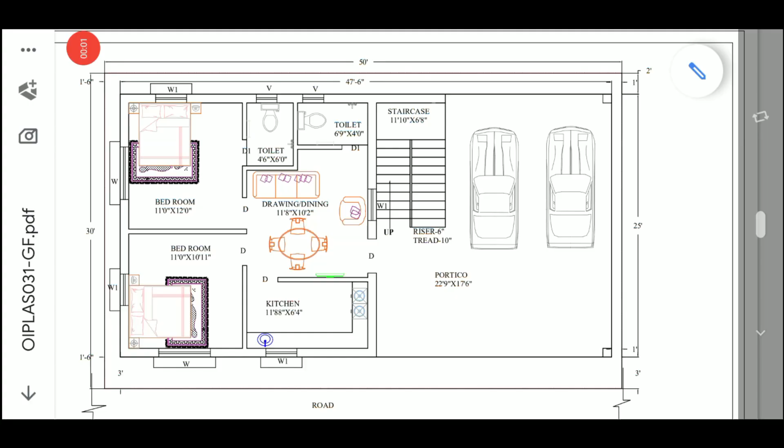Hey guys, this is Mainak from Civil Center, and today I'm back with another plan in a plot area of 1500 square feet. The building is east facing, having two floors or stories, that is a G+1 building.

Now let us quickly look at the dimensions of the plot. As you can see, the dimensions of the plot are 50 feet into 30 feet. The dimensions of the built up area of the ground floor are 47 feet 6 inches into 25 feet.

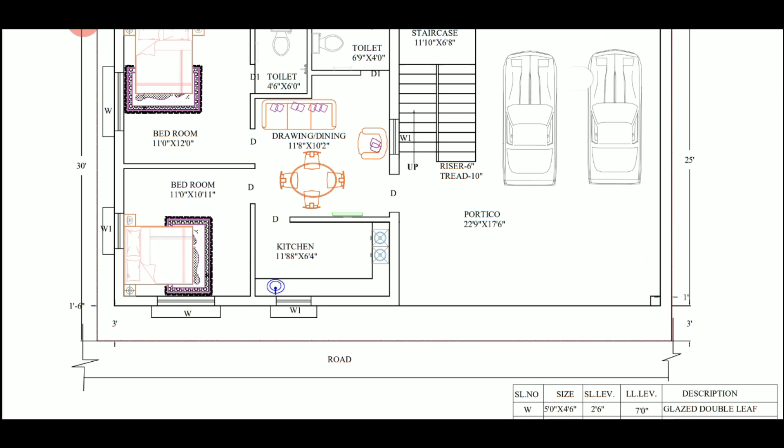Setbacks are the distance between the boundary or corner of the plot and the portion where construction has been done. The setback on the rear side is 2 feet, and on the front side we have provided a setback of 3 feet. On the left side we have given a setback of 1 feet 6 inches, and on the right side a setback of 1 feet. These are the distances left from the boundary of the plot.

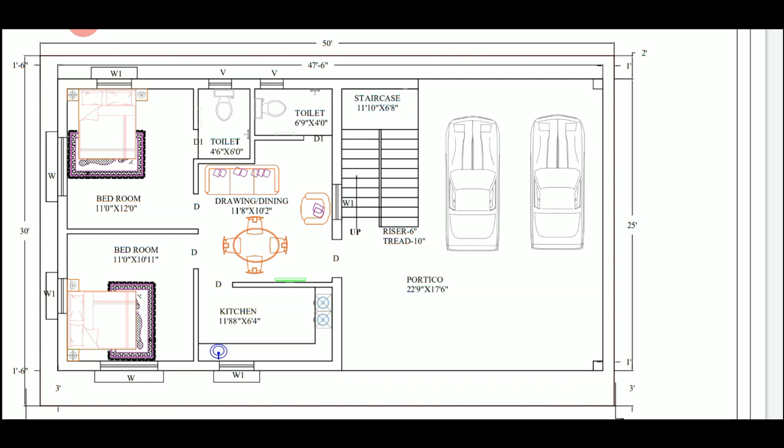Now let us discuss the components of this ground floor building. In the ground floor we have provided a portico, two bedrooms, one attached toilet, one common toilet, a drawing cum dining area, and one kitchen. Now let us start with a detailed description.

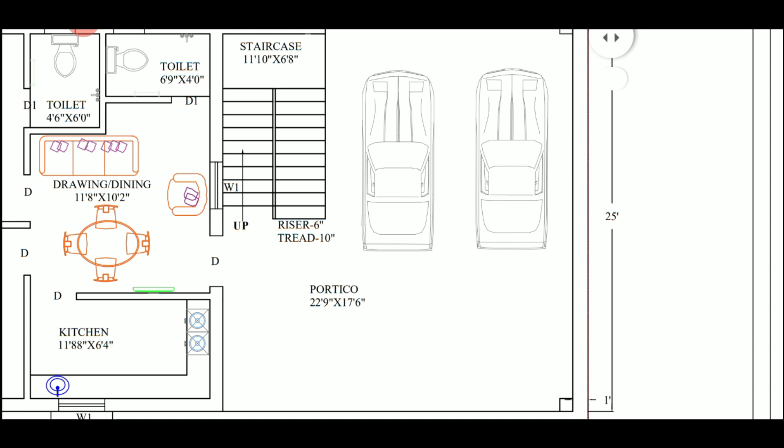The portico size is 22 feet 9 inches into 17 feet 6 inches. This space is sufficient for parking 2 four-wheelers and a minimum of 6 two-wheelers. This has been done because in this building we will have 3 units. In the ground floor we have 1 unit, and in the first floor we have 2 units, meaning 3 families can reside in this building. The parking space has been given accordingly.

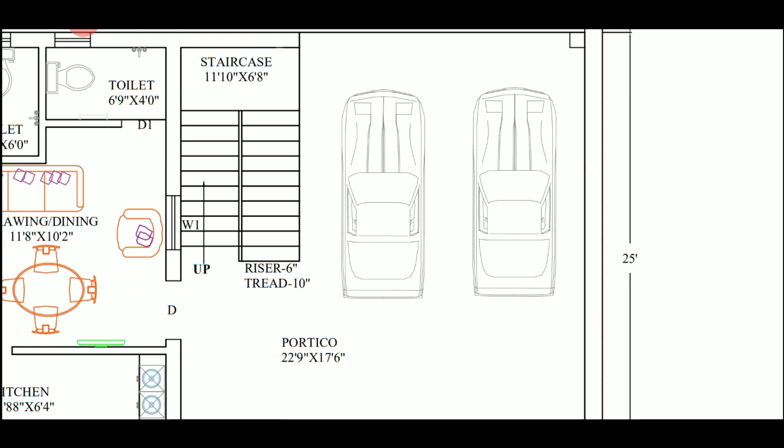The staircase has been given in such a way that all 3 units can use it independently. It is a dog leg staircase having a riser of 6 inches and tread of 10 inches, which is the standard dimension for a residential building.

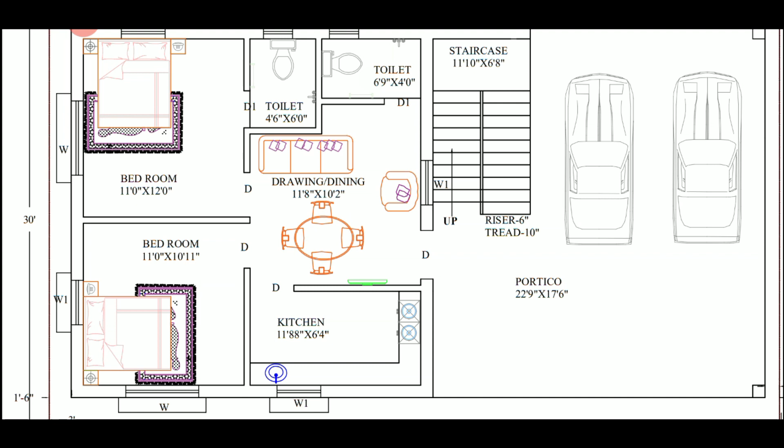Moving forward, in the first unit of the ground floor, the entrance leads to the drawing cum dining area. The dining area is adjacent to the kitchen because both have similar utility. The size of the kitchen is 11 feet 8 inches into 6 feet 4 inches. This is the drawing area where guests as well as residents of the house can come and sit.

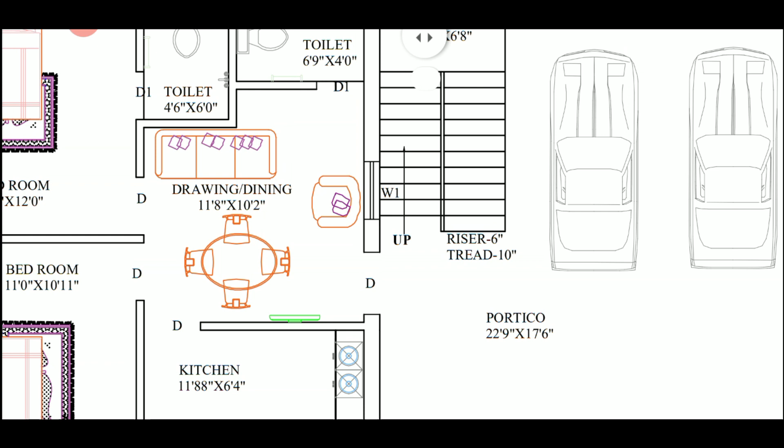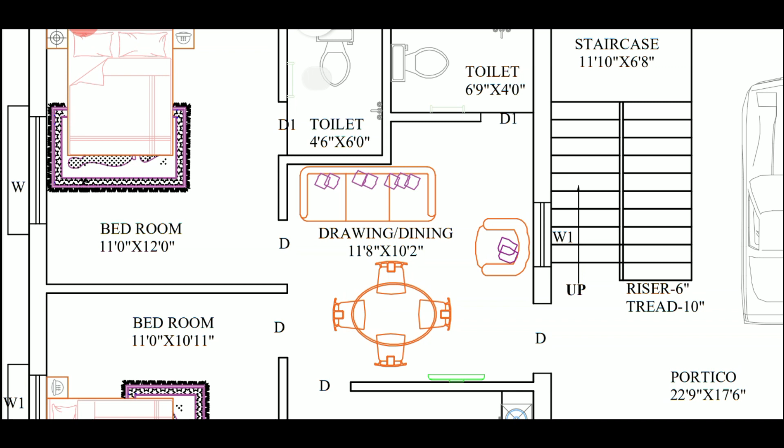There is a common toilet here having a size of 6 feet 9 inches into 4 feet. There are 2 bedrooms which are quite decent in size. The first bedroom is 11 feet into 10 feet 11 inches, and the second bedroom, which has an attached toilet, is 11 feet into 12 feet. The size of the attached toilet is 4 feet 6 inches into 6 feet. These were the dimensions of the elements in the ground floor.

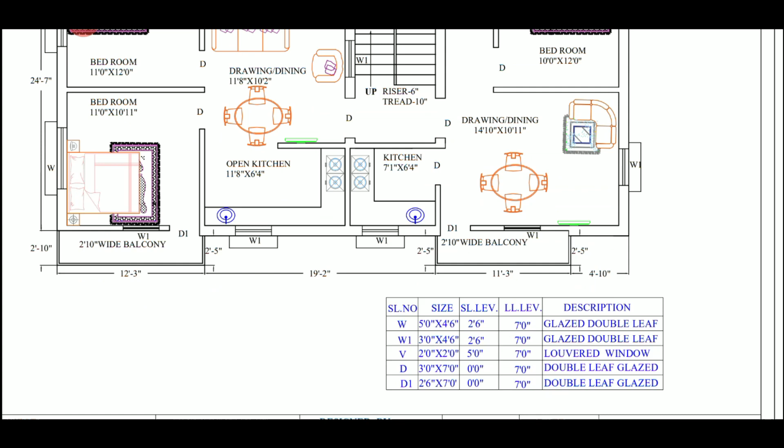Now let us quickly go through our first floor plan. The built up area of the first floor is 1244.32 square feet compared to 1187 square feet of the ground floor. This is due to the balconies we have provided in the rooms. In the first floor we have 2 separate units: one is the 1BHK portion, that is 1 bedroom, 1 kitchen and 1 dining, and the other is a 2BHK portion.

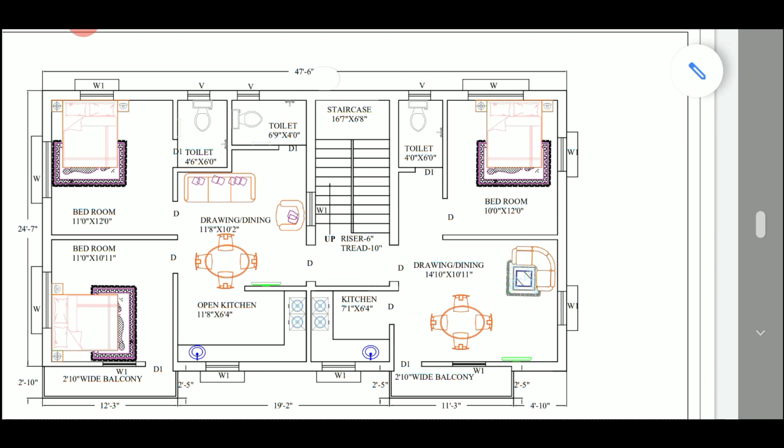So now let us first describe this portion. Here we have one bedroom of size 10 feet into 12 feet. So this is the size of the bedroom.

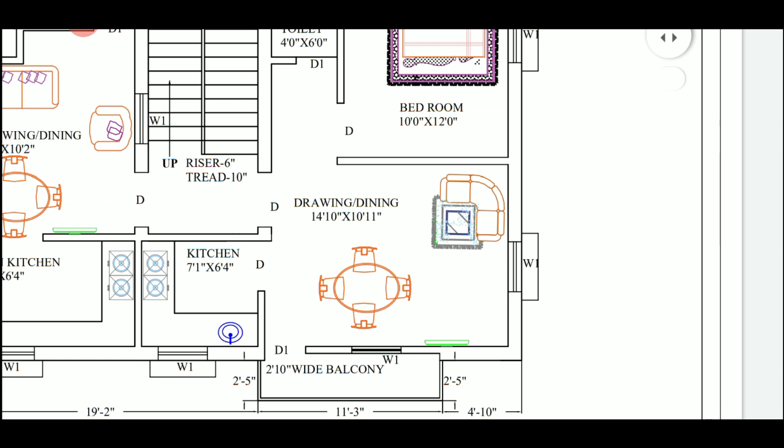We have one common toilet of 4 feet into 6 feet, and then again we have a kitchen here of 7 feet into 6 feet 4 inches, and one drawing cum dining area which is quite decent in its size, 14 feet 10 inches into 10 feet 11 inches.

Now as you can see here, we have given a balcony of 2 feet 10 inches wide. So 2 feet 10 inches is the width of the balcony, so it will give some proper aeration and sunlight to this first floor plan.

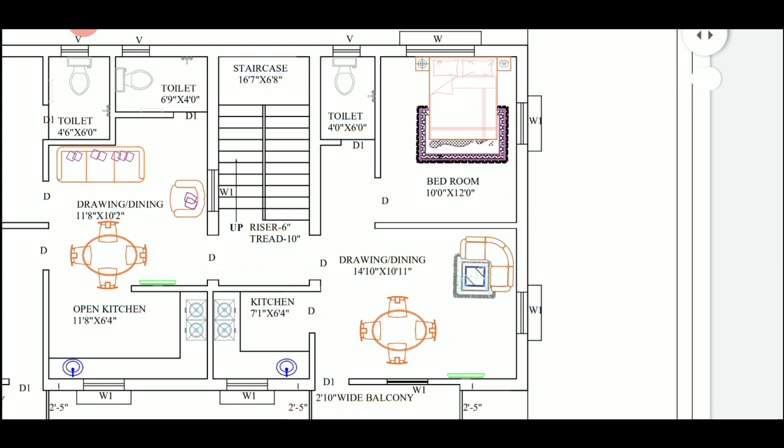Now this unit is suitable for a small family or bachelor, which can also be given for rent. Now let us move to the other unit.

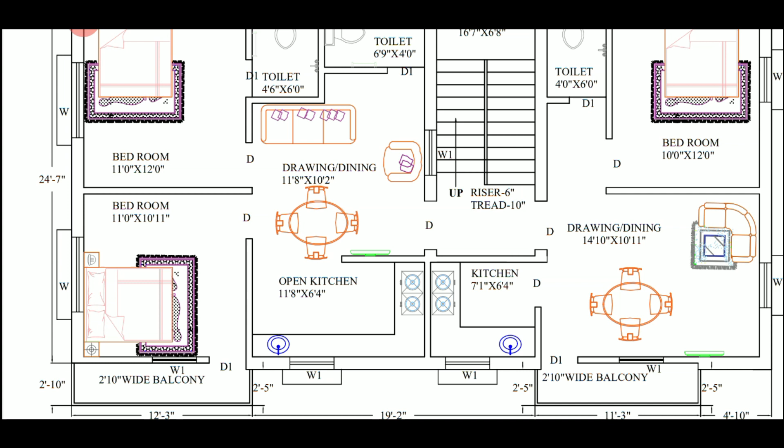As you know, the other unit is similar to the unit which we had seen in the ground floor. The only addition is that we have a balcony of 2 feet 10 inches wide here. So these are basically 2 bedrooms having one attached toilet, one common toilet, one drawing area and one kitchen. So this is the plan for the first floor of the building.

Now let us discuss about the door window schedule. As we had discussed also in our previous videos, let us first discuss about the door. So we've given two types of doors here having sizes of 3 feet into 7 feet. Now the lintel level of all the doors and windows is 7 feet.

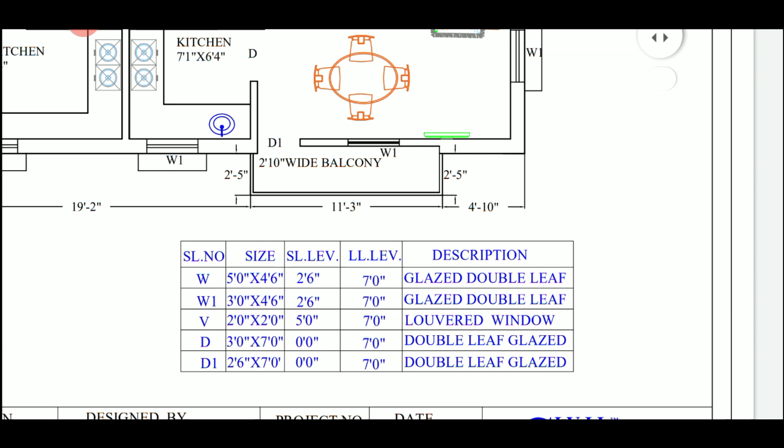So the lintel level is 7 feet, and we have given two types of doors, that is all the main doors are of 3 feet width, and the doors of the balconies and the door of the toilet, as you can see here, is of 2 feet 6 inches.

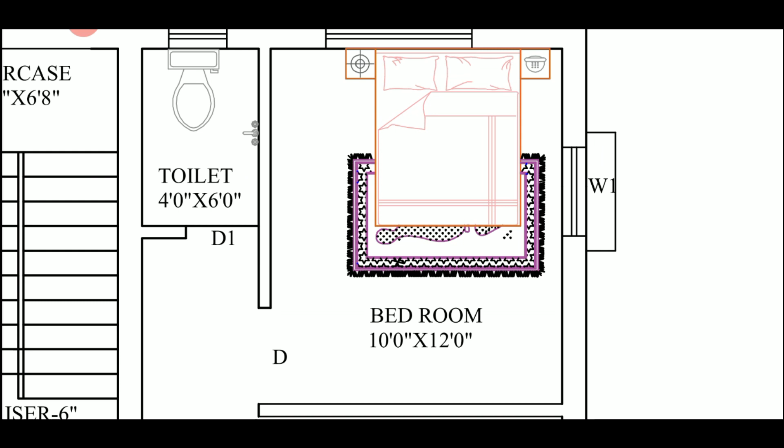And this line in this plan, as we all know, has been shown to indicate that the slab or the level of the toilet is at a lower level. So these are the door schedule.

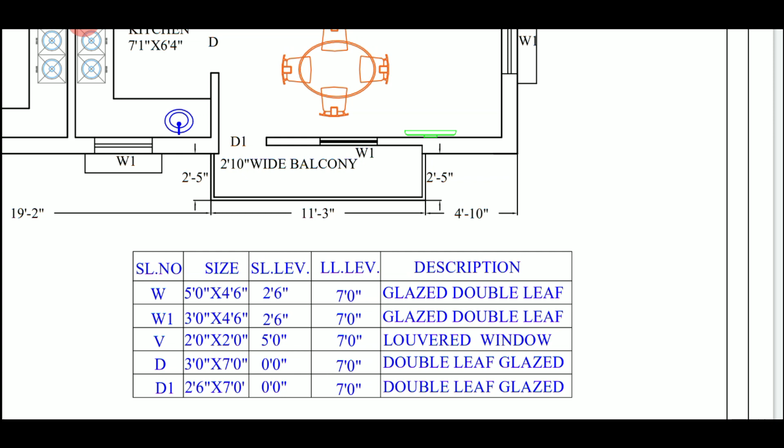And the window schedule, let us discuss here. You are given two types of windows here, that is W and W1. The W size is 5 feet into 4 feet 6 inches and 3 feet into 4 feet 6 inches. Now the sill level or the window sill level is the bottom level of the window, which is given at a standard height of 2 feet 6 inches.

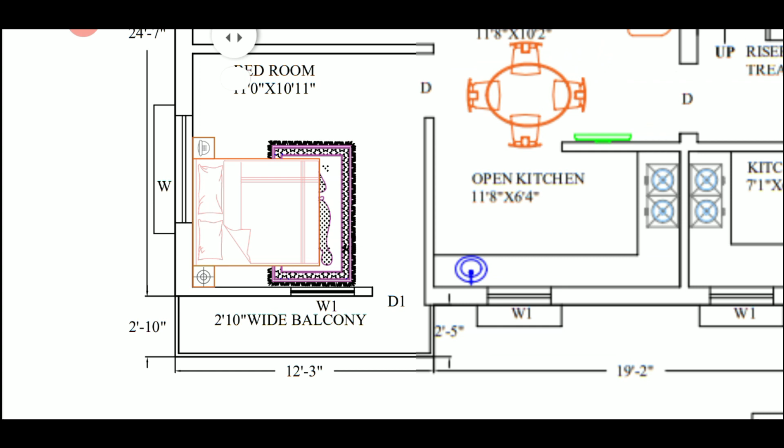Now let us see where we have given W and W1. Let us first observe this bedroom. In this bedroom, as you can see here, we have given one window of 5 feet width, which is W, and along this direction we have given another window, W1, which is of 3 feet width. So there are two types of windows here.

Here also we have provided W1 along this side, and as you can see, in the bedroom only we have provided another W here. Here also we have a bedroom where we have provided W, that is the 5 feet width window. So this is all about the door window schedule.

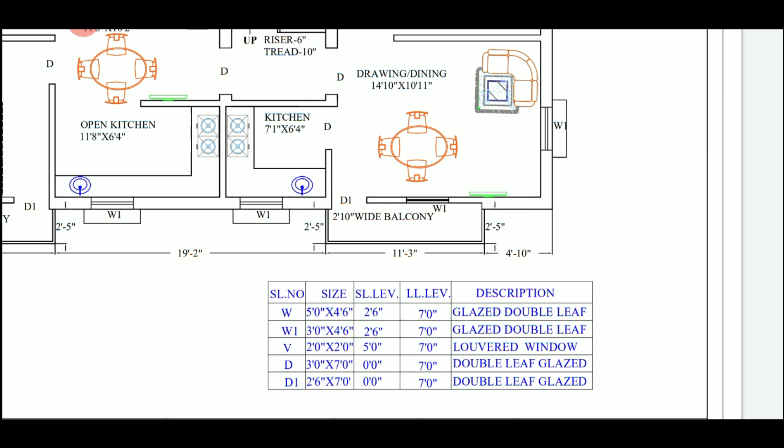We also have ventilators here. One type of ventilator we have provided, which is 2 feet into 2 feet, provided in all the toilets of the ground floor as well as the first floor.

So this was a building plan of plot area 1500 square feet, and ground floor built up area around 1200 square feet. So friends, how did you find this video?